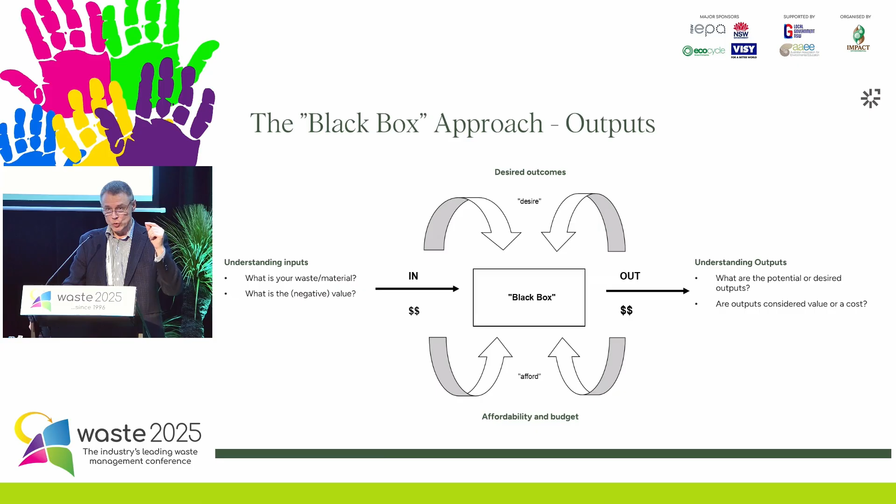So the same box, but slightly different story. In anaerobic digestion in Australia, it's all about the outputs. We know what the inputs are. There's plenty of food waste around. There's FOGO around the corner, and you can anaerobically digest all of this stuff. The problem is, what do you do with the stuff coming out the other end? We know a little bit about biogas, because why? It's pretty much the same as landfill gas. But digestate.

The EPA in New South Wales is on a funny planet because they say, we really want you to process organic waste. And yes, we certainly support anaerobic digestion. Fantastic. Have they got a regulation for digestate? No. So what do you do? You don't invest. It's very simple. It's really, really simple.

The environment industry, our industry here, lives and dies by regulation. If we didn't have a landfill levy, there would be 2 people in this room, landfillers, right? And they would be interested in AD, in landfill gas. So all of us here live and die by regulation. And I think the government isn't really deeply aware of that really simple message. But if you've got the wrong regulation or no regulation, it's a risk, right?

So if I look at, and Angus will talk about the regulations a little bit later on. If I look at New South Wales, to me at the moment, when it comes to anaerobic digestion, it goes into the basket case. Because if you want to do anaerobic digestion in New South Wales, you have no regulation for the digestate, so you have to then treat it as a compost. That is an additional cost, and in most cases, I'd say it kills the business case.

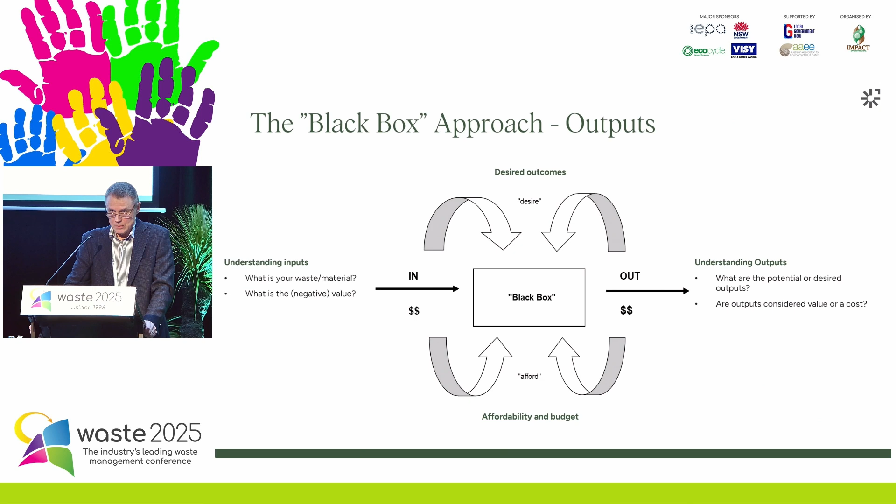It would be quite different if you had a regulation that allowed, after certain treatments, to take digestate out to land. Digestate can have fertilizer values, and suddenly the whole story changes because now you've got a value. Now you can talk, now you can create a business case.

Anyway, sorry to say that, but we need working, realistic, commercially viable regulation. Without that, it ain't going to happen. Can I have the next slide? Thank you. So SLI has done a couple of AD projects around the world, and here are some very high-level numbers. Keep in mind, they're high level, and a lot of these numbers depend on the detail, on the location, on your development approval, on your licensing conditions.

And of course, a lot of it depends on the use of your biogas and the pathway for digestate. We'll talk about biogas use in a minute, and we talked about digestate beforehand. But if you look at these numbers, they give you a high-level idea. We're talking, if you talk high-tech anaerobic digestion, European style, designed for being operated within the vicinity of urban development, you are talking pretty much the same investment as you need for an enclosed composting facility, maybe a bit more. The difference between dry and wet is not that big.

The difference between biogas to CHP, which is combined heat and power, to biogas to biomethane is between $4 and $5 million. That is the capture of the CO2, the filling station for the gas, and when you then talk grid injection, it costs even more, right? Which in Australia is, I think, not viable.

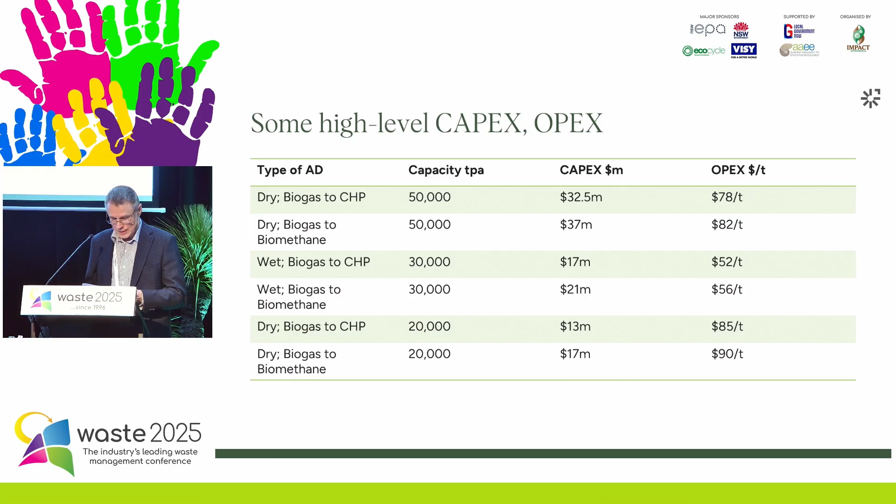Thank you. Next slide, please. Oh sorry, yeah, I can do it myself now, I hope. So, some other commercial aspects. I think we still don't value biogas or biomethane really in Australia. Little example.

The typical biogas content of food organics is around 150 normal cubic meters per ton. That has been proven many times over. Bill can confirm that for some work he's done himself. And that is biogas, so that's not methane. Biogas is a mixture of CO2 and CH4. Garden organics, that is the leafy matter—wood doesn't digest—has around 90 cubic meters per ton in biogas yield.

The methane content typically fluctuates between 50 to 60%. If you assume 10,000 tons of FOGO with only 10% food organics and 85% garden organics, and I've just assumed 5% contamination in there for the sake of the numbers, you get around 915,000 normal cubic meters of biogas. That has an energy content of $235,000 at a wholesale price of $46 per megawatt hour. That $46 was the average wholesale price into the grid in New South Wales in the last quarter of last calendar year.

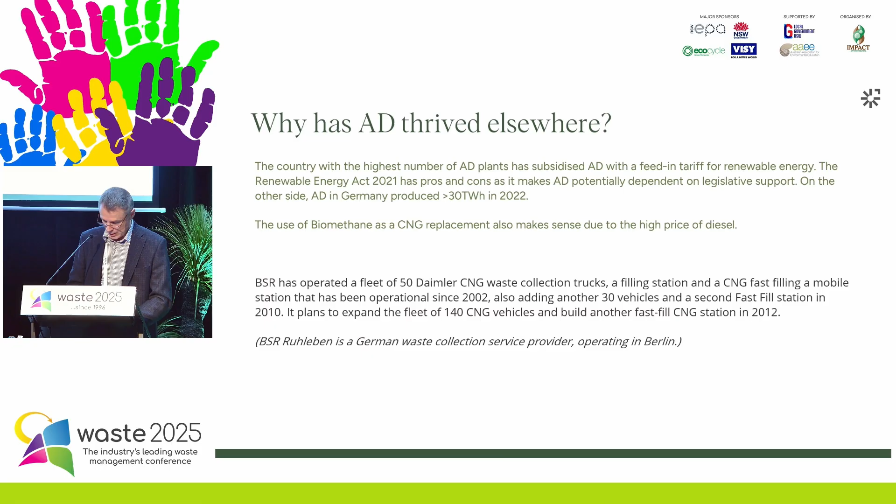When we talk about biomethane replacing the price of diesel, you might ask how does that work. Well, the city of Berlin has been doing this since 2002. They take their FOGO to an AD plant, strip the CO2 out of the biogas, compress the biomethane, and fill it in their trucks. They now have a fleet of, I'm not sure, 140 of those trucks running around Berlin on waste, collecting the waste. This has been going on for around 20 years, so it's not a big deal.

So why has AD thrived elsewhere? Well, as I said before, regulation helps, politics help. In Germany, for example, they had a feed-in tariff for biogas or biomethane, so you knew what you were getting for your product. AD in Europe is largely agriculturally based, because the agricultural sector has a lot of organic waste, and digesting it makes perfect sense to them because they can use the biogas on their farm to cut down their own operating costs.

Germany has around 10,000 AD plants. So I don't want to hear from anybody anything about technology problems. If you can't get it going, you wouldn't have 10,000 plants around. The gross electricity production in Germany by those plants was around 33 terawatt hours per annum. So, 52,000 jobs in the bioenergy sector.

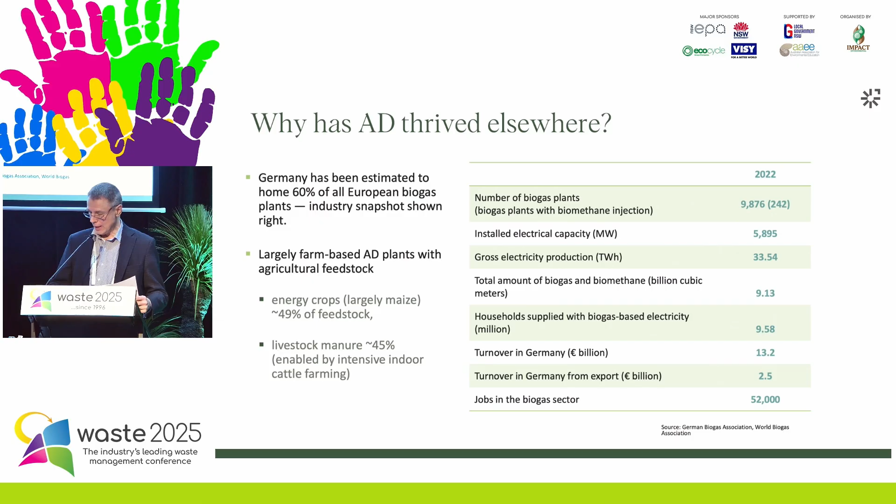Points that should convince a politician to do something for it. And that's how I'd like to end my presentation. Thank you very much.

Thanks, Frank. Great start. So if we can pop over to the next set of slides. It's my turn. Great, and that's the right button. Always press the right button.

Okay, so a few key messages to kick off. Planning and regulatory compliance for anaerobic digestion is not easy, but with determination and good advice, it is achievable in New South Wales and Australia more broadly. It is extremely important to get the expectations of decision makers right up front. And the good news is, with high regulatory barriers, those remain barriers for entry for everybody else. So if you can get through it, your competition has a fair wall to get over to be competitive with you.

I thought it was best if we really frame the discussion, because we want to open this out to you guys a bit later. So what are we talking about? Frank jumped straight into it, but really here we're talking about centralised facilities where waste is collected from waste generators and delivered to a separate processing facility. So this is not on-site stuff. It's a little bit easier to achieve from a regulatory point of view. And we are talking fairly large-scale facilities in the context of Australia. We're talking about a minimum economic scale for a centralised facility of about 20,000 tonnes per year.

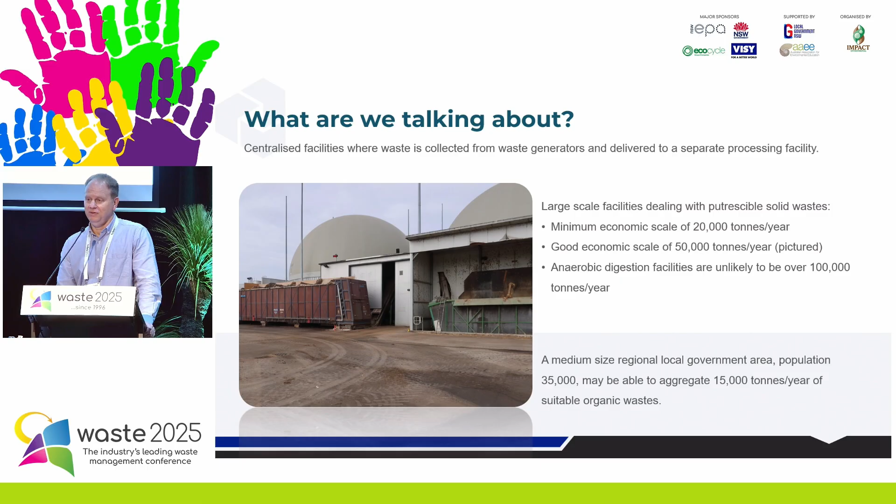There are many other parts other than just anaerobic digestion to an AD facility. You're going to need gas storage, either with steel or membrane covers. You're going to likely need a CHP, a combined heat and power engine. Alternatively, you can upgrade the gas to a fuel to make biomethane. You can dry and pelletize the digestate like the Earth Power facility does in Sydney. And you can, if you're very clever, use the heat for adjacent industrial uses.

Now, I think Frank touched on this, that the regulators have shown a bit of a preference for digestate going to composting to ensure pasteurisation and stabilisation, but some AD processes can also pasteurize. It really does add to the cost if you have to run a whole separate composting process next to an AD facility. But it's the way the regulations are set up at the moment, particularly in New South Wales and Victoria - digestate going to composting is easier to get over the line.

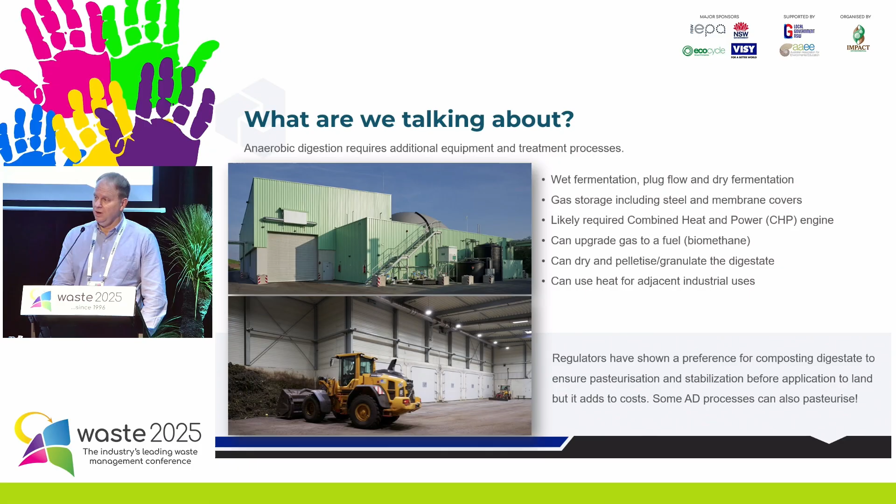Okay, so again, we're framing the discussion here. What are we talking about in terms of waste inputs? Because what regulations apply to the construction and operation of these facilities depends, in part, on the types of wastes that need to be processed. So we're talking about source-separated waste. They're almost always going to need some form of decontamination, as Earth Power found out the hard way.

The types of materials we're talking about is commercial food waste. FOGO can definitely go into these types of facilities, particularly if they're dry anaerobic fermentation, but usually not garden organics or wood waste. Those are sources of carbon to do co-composting with the digestate after the AD process.

Other sorts of inputs we commonly see as being interesting for AD is grease trap waste, septic pump outs, and dissolved air flotation sludges. It's really an open question about whether we should consider adding in biosolids. Depends on the source of those biosolids. There's definitely a lot of regulatory risk around biosolids in the coming years, application to land. Basically an AD process doesn't help any more than a composting process in removing the risks associated with things like biosolids.

These other inputs like manure and paunch, as Frank said, in Europe agricultural inputs are common, but here, can you actually fund the facility with gate fees from those sorts of materials? Not really. So you've got to have all the other regulatory frameworks lining up and policy encouragements lining up to make that sort of input happen. And food processing waste, almost certainly, but you've got to really make sure you characterise it.

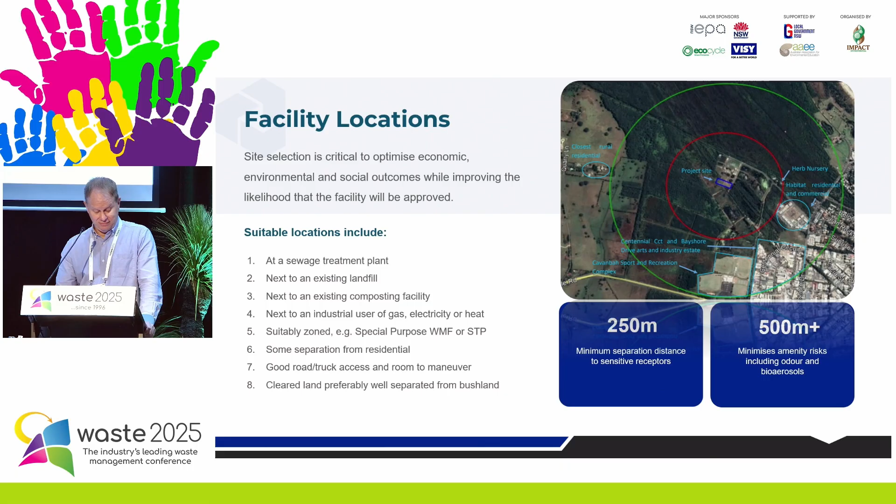Really good access to roads, suitable for large vehicles, trucks, and cleared land is preferred, particularly to avoid problems around complying with various biodiversity regulations. Okay.

Okay, the other aspect is outputs and their uses. So the various products coming out of an AD plant: digestate, it's pretty wet and unstable. As we talked about before, you can have a pelletized or granulated organic fertilizer that makes it a lot more transportable. You can have composted digestate, biogas or biogas upgraded to biomethane. Electricity for use on site.

One of the best usage cases for AD, I think, is to actually provide the energy for a waste management facility to operate itself. Particularly large in-vessel composting facilities can require a lot of electrical power. Heat for drying or industrial uses. The drying helps in the pelletizing process. And carbon dioxide as well, interestingly. If you separate the carbon dioxide from the methane, you can actually have a use for the carbon dioxide too. So that's a wide range of uses there, and pictured there is actually a little biomethane fuel station from that same plant in Austria.

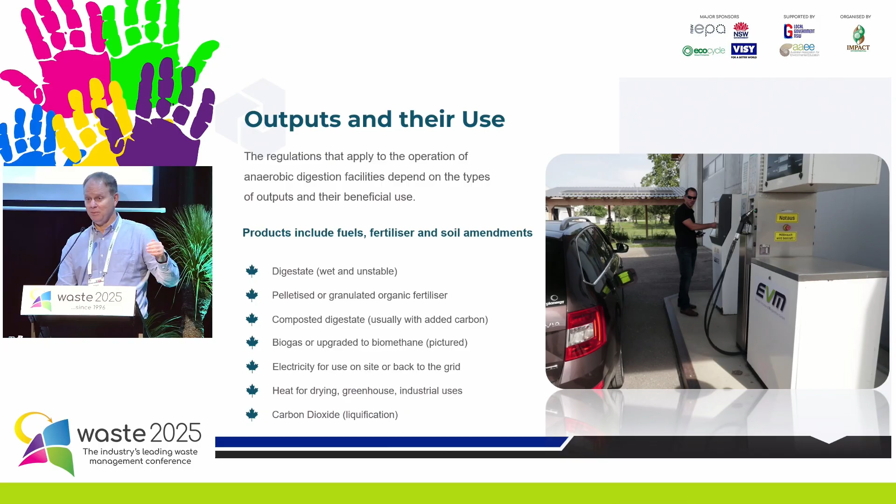So, overview of planning and regulation. This is a very top-level overview, okay? And I've made it fairly focused on the New South Wales context. So, starting at the bottom level, local level, you're going to have to...

It's not actually moving, yes. Yeah, lift it up higher.

So, meeting all the local LEP and DCP requirements, obviously. It'll be a type of energy recovery facility, not just a waste management facility, so you've got extra hurdles to jump over there. In New South Wales, that'll make it a designated and integrated development, particularly at the scales I've talked about. It's generally approved at a regional or perhaps state level. Very comprehensive EIA required. Extensive consultation is really important. The community doesn't generally know what anaerobic digestion is. They've got a decent idea with composting, but not so much with anaerobic digestion.

And the EPA will be involved in both the consent and issuing the license. And be aware that the biogas is an eligible waste fuel under the Energy from Waste policy in New South Wales, and you're going to need a specific resource recovery order and exemption to burn that stuff in your CHP, even though you're burning it on the same site you're producing it, which is really interesting. Found that out the hard way.

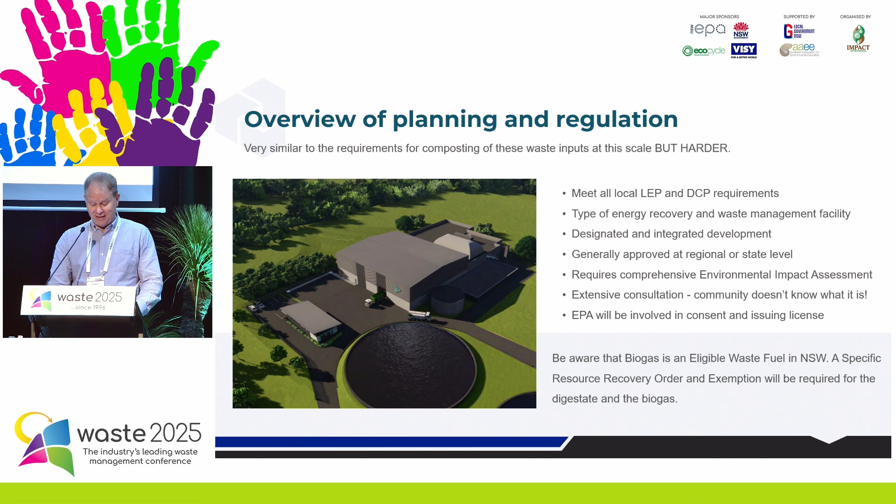So, planning pitfalls. Got to start really early. At least 2 years. Absolute minimum. Really longer. It can take 5 years quite easily to get one of these facilities up, in New South Wales at least. And in fact, we're in a bit of a moving feast there. In that sort of time frame, the regulations and the guidelines can actually change while you're planning it. So work really hard on consultation, explain the project to all stakeholders, including all of the government authorities who don't necessarily know what it is either.

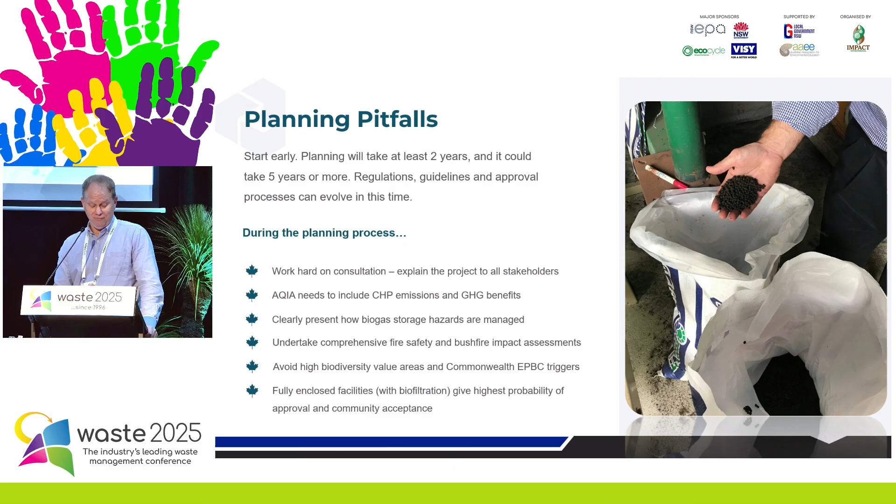Your air quality impact assessment, make sure you include your CHP emissions, and also work out the greenhouse gas benefits. That's one of the biggest positives of an anaerobic digestion process. Clearly present how the biogas storage and combustion hazards are being managed. Okay, surprisingly large worries around that. So you'll end up having a comprehensive fire safety and bushfire impact assessment, particularly if you're close to bushland. And I would say fully enclosed facilities are the way to go.

Okay, again, I'm going to focus a bit on the New South Wales situation here. The New South Wales Resource Recovery Framework is what applies to the application of the outputs to land and the biogas. In Queensland, there's arguably a better framework that at least contemplates an end of waste, the end of waste framework, which publishes codes and approvals, a bit like our general and specific resource recovery orders and exemptions in New South Wales. If you want to ask more questions about that, there's quite a bit of detail, so we can get into it afterwards.

Okay, so look, one of the biggest problems we have in terms of the regulatory risk is the anaerobic digestion facilities usually require these specific orders and exemptions, but they won't be issued until after the facility is built. So basically, as an investor, you have to go in trusting that you're actually going to be able to take this output to somewhere other than a landfill, which is a bit of a big commercial risk.

It is possible to submit an application to the New South Wales EPA before construction and get feedback, and you should seek a technology with a great track record of processing the same, ideally, but probably just similar inputs overseas. And you've got to characterise those inputs and test the outputs, possibly at a pilot facility elsewhere in Australia or overseas, or do it bench scale, which I've previously done with Bill before.

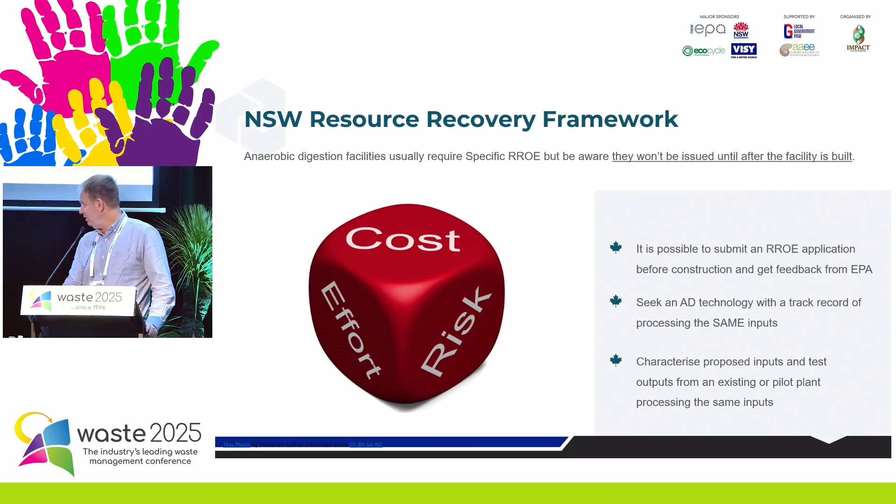Okay, so there's a bunch of new guidance and updates to regulation going on in New South Wales, or at least consultation on it. So there's new guidance on the resource recovery framework. To be honest, it doesn't really change much. It just doubles down on it and explains it in a lot more detail. There is this thing called the resource recovery innovation pathway that looks a bit exciting, but it's still a concept at the moment. Looks good. But yeah, the jury's still out on whether it will actually be implemented the way it looks at the moment.

The New South Wales Energy from Waste framework is also under review, but biogas is effectively proposed to remain an eligible waste fuel, so that doesn't really change things. And the old 4 locations identified for energy from waste, well, AD doesn't have to fall in those locations, it can be anywhere, so it's not limited by that.

Also, there is still a review of the biosolids guidelines going on. When that will end, I don't know. They're apparently still doing a lot of direct consultation with stakeholders, and we still await whether that will actually massively change what can be done with biosolids. And biosolids are often going into AD facilities too, so that will be a big change to the framework. So there's a lot of regulatory risk in terms of change as well. That's the message. But it can be navigated, and a conservative path can be taken to start with.

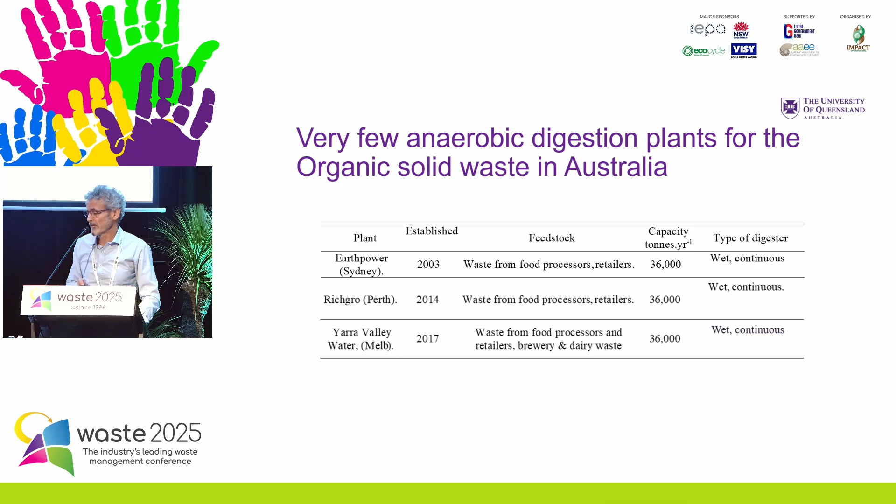Without dwelling on this too much, anaerobic digestion, regardless of whether we're talking wet or dry processes, the stages are, well, first of all, microorganisms don't have teeth, so the organic solids have to be solubilized, and certainly if you're talking about green waste, this is the rate limiting step. And in fact, the more solid the material is, the more lignocellulosic sort of materials, they're very easy to operate, because as soon as material is solubilized, it's going to be converted to methane. In terms of the stability of the anaerobic digesters for more solid sort of material, very simple. It's a bit more challenging if you've got readily soluble sugary sort of wastes. Of course, they can become acidic and the system can sour, so they require a bit more control.

So once you've hydrolyzed and solubilized the organic material, and you've converted it to monomers or short-chained molecules, then they need to be fermented to either acetic acid or volatile fatty acids, alcohol, and then there are a group of organisms that can get energy from those short-chain compounds and produce acetic acid and hydrogen, which of course is the substrate for methanogens.

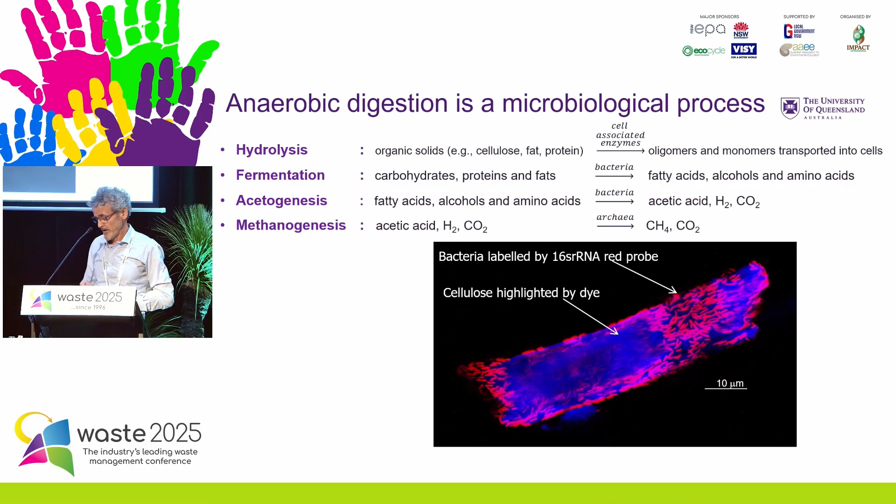And so if we look at the picture of an organic particle, it needs to be colonised initially by the organisms that can hydrolyse, and they're only doing that because they're going to eat the products, so they don't do it for altruistic reasons. They need to eat themselves. And then as that biofilm establishes, all of the other organisms further on down the chain, including the methanogens, sit on the surface in an extracellular polymeric matrix under the microscope.

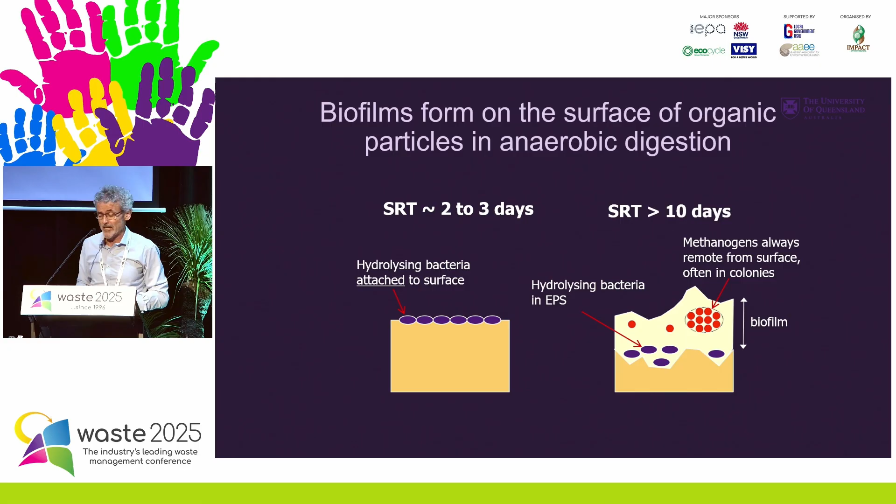So you're just facilitating that process, and anaerobic digestion, even though the microbiology of the process is complex, all these organisms are ubiquitous, and I'll just demonstrate that by the fact that we've started anaerobic digestion processes on a number of occasions without any inoculum. Okay. Dry. Well, even a wet process. I'll give an example of that.

So again, just looking at the two extremes, I've made one mistake here. This should be less than 10% dry matter. If we're talking about a wet process, you need to be able to move the material around. So wet processes are always continuous. You never have batch wet processes. So you're pumping in the waste, and the digestion is very quick. It's not controlled by hydrolysis.

So the main challenge with wet processes is retaining the biomass, because if the hydraulic residence time is only a week or something, and the solids also have the same residence time, you're going to wash out your microorganisms unless you retain them.

And you can think of Golden Circle, the fruit cannery; other plants have this sort of process where they had a fermentation acidification tank initially. So fresh material comes in here, and then the liquor goes through an upflow anaerobic sludge blanket reactor. So the methanogens are in granules here, and they're retained. And so this process can run at a very short residence time.

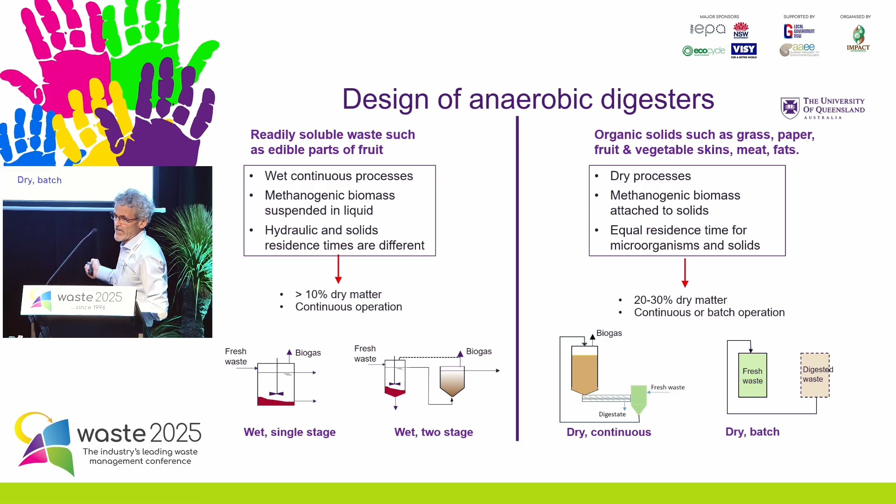But then we have the batch processes, and so you've just got a mature batch in a shed, in a container, and you might run liquor from that container to the fresh batch, or you might actually run some of the solids from the old batch and mix it with the fresh waste to start the digestion.

And so here's some examples that we've done, and as I say, as academics, we compete on a global scale in publishing, and so we tend to try and find niches in Australia where we can implement this sort of work. And probably the initial experiment we did was a few years ago now. This is 2008, this publication, and this is Bush Holdings banana

packaging shed in Tully, and if you've watched the War on Waste, they've talked about bananas there. They waste so many bananas, well, certainly back in these days, they wasted 60% of the crop or something because the bananas were fine, but they were the wrong shape. So we were feeding bananas to a hopper.

Here's a hopper here. The bananas, here's the digester here. And so they just pumped liquor from this digester and flushed the rejected bananas into this huge bag, basically. And the bananas are 90% water, and of the actual solid content in banana, about 90% of it is biodegradable.

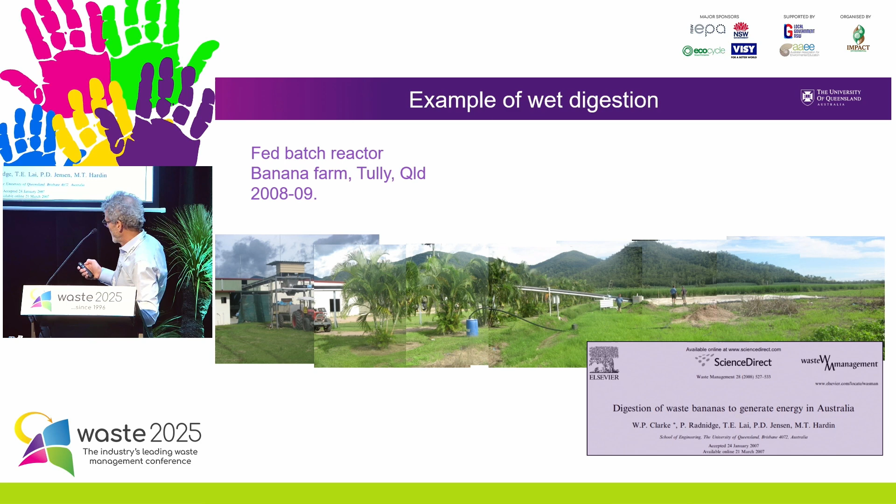So we were getting over 300 cubic metres of methane per dry tonne of banana. And we published this work. You can see here, this reactor was just fed with bananas and sodium bicarbonate as a buffer. No inoculum. We didn't want to bring sewage sludge into a food processing facility, so we had no inoculum at all. And you can see here the digester working quite happily with biogas being produced.

So that's an example of a fed batch digester. By that I mean that bananas were just put in; because they were so completely digestible, there's not much solid residue left. So we could just keep on feeding bananas in. Eventually, the digester had to be desludged, but after a few years.

That's one application. Another application was on the UQ campus. We implemented an anaerobic digestion plant to treat black water, being toilet water, basically from the mechanical engineering building in the middle of the engineering precinct. I'll just show a couple of pictures there. But the objective of this anaerobic digester was to produce non-potable Class A water, which we irrigated right there around the plant, in the middle of the engineering precinct.

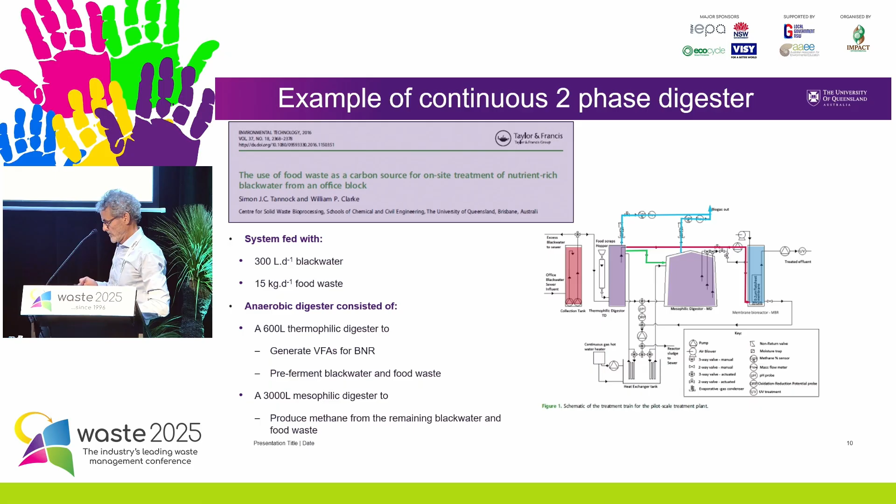There we go. I'm watching. Thanks, Mike. Yeah.

Here's the plant here, and the wastewater was pumped directly from the building. We didn't have to handle any black water. Pumped into the container. We had to manually feed the food waste, and we were producing about 4 cubic metres of biogas per day through a flare up the top there, and then we were producing the non-potable Class A water, and we're irrigating that where thousands of students move.

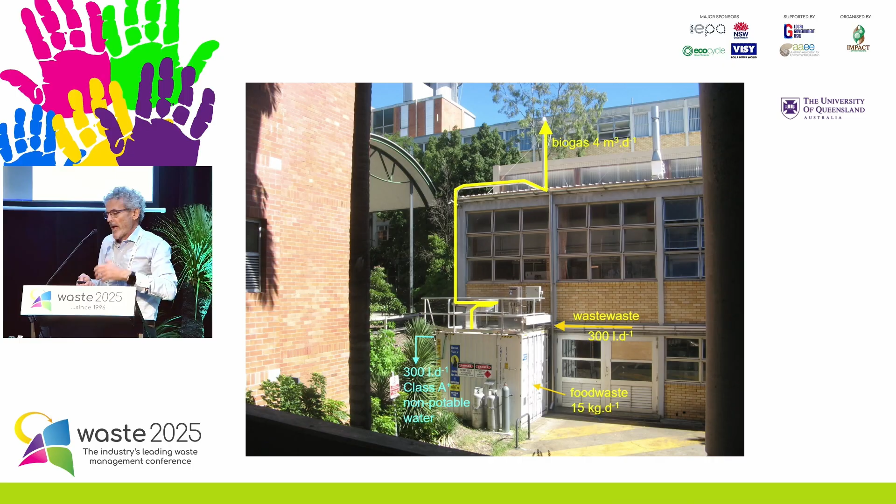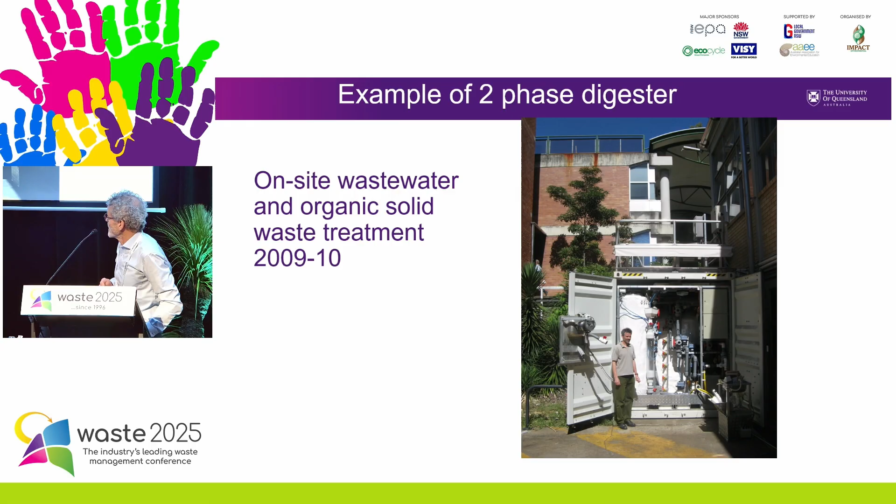And I can see the slide here. It's not coming up. Oh, there we go.

So there's the first stage. We had heat exchangers, so we ran the fermentation tank thermophilic, 55 degrees. The methanogenic tank was 38. The effluent tank, where we stored some of the effluent before pumping out into the garden, the membrane bioreactor.

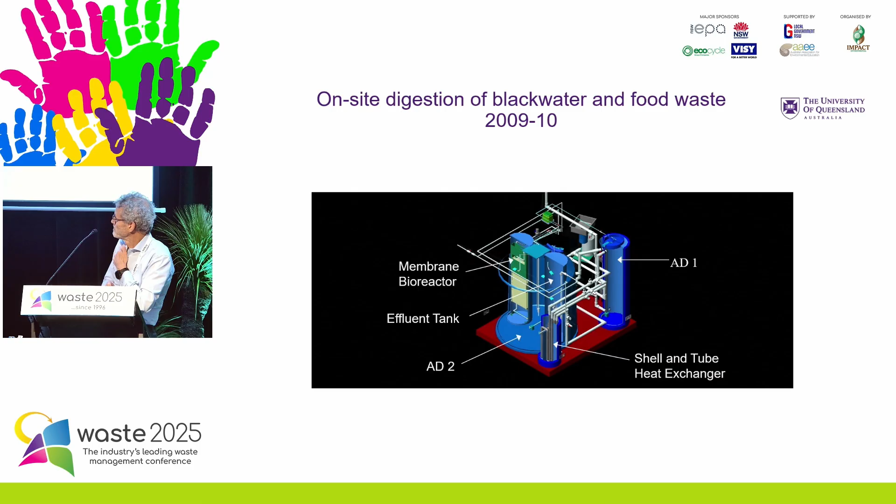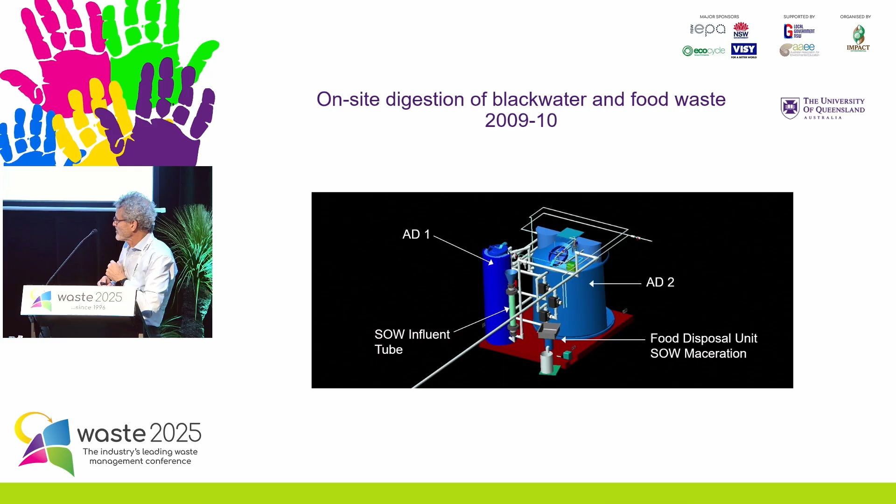Just to give you a different view here. The little tray there's where we fed the food waste, solid organic waste influent. Once we fed it into the macerator, we pumped it into the first stage. So this plant is a bit more elaborate because it was running as a continuous process.

Okay, so now dry batch digestion. We've done a lot of work on dry batch digestion. This diagram was from a paper many years ago, which shows the inoculation process that we use, which is quite a simple process. We just have a fresh batch of waste here, and we just take liquor from a stabilised methanogenic batch of waste, and we feed it to the fresh batch.

And that displaces a lot of acids, volatile fatty acids, from the fresh batch, which we feed back to the stabilised batch, which produces methane. And eventually, after this initial nursing stage, if you like, they can then operate separately and finish the digestion process.

And of course, these processes are established around the world. As you know, California are now stopping organic waste going to landfill, and there's a proliferation of these sorts of plants around the place, and 3 of them look very similar. Materials are loaded into tunnels and then digested.

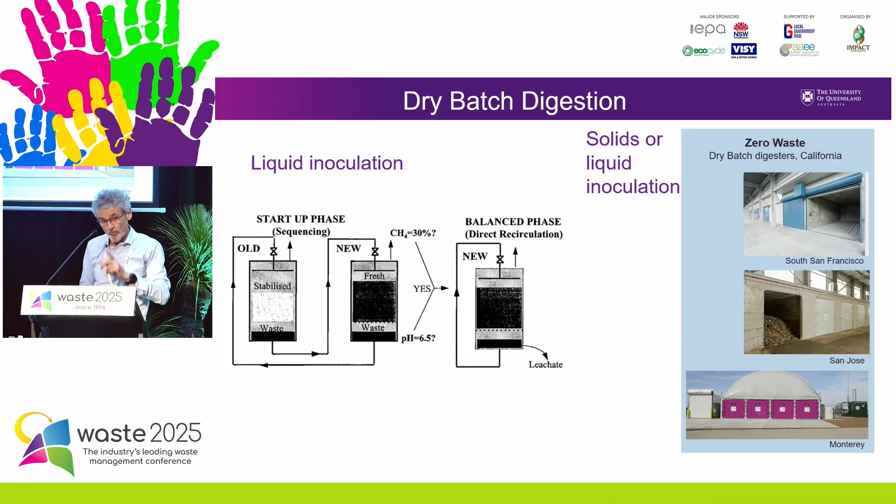But we've had the opportunity to try this ourselves, thanks to Frank here, when Frank was working with T Services and initiated this process. So we've been out sampling municipal solid waste. Over the years, we've done a lot of work on municipal solid waste, so unsorted municipal solid waste.

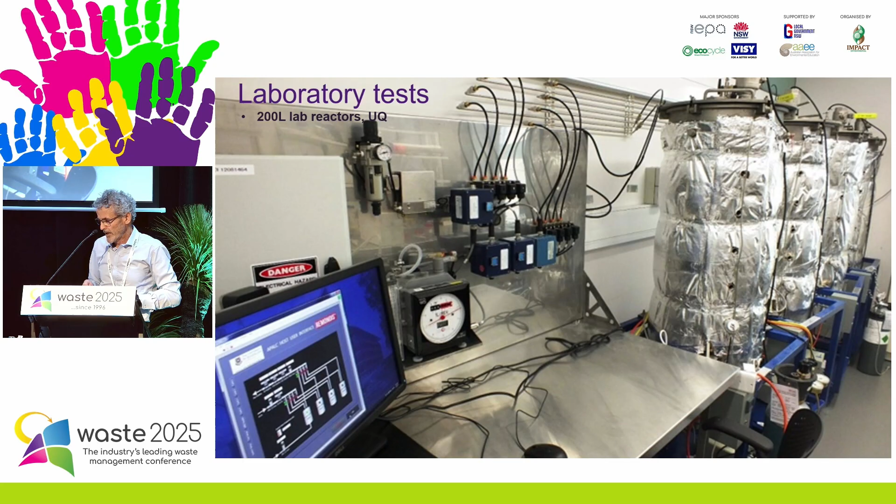We do a lot of lab work, and these are the tools of our trade, these 200-litre reactors. You need a fairly large reactor to get a representative fraction of solid waste. So we can run trials at various configurations here. But the one trial I want to speak about are the biocells that we ran.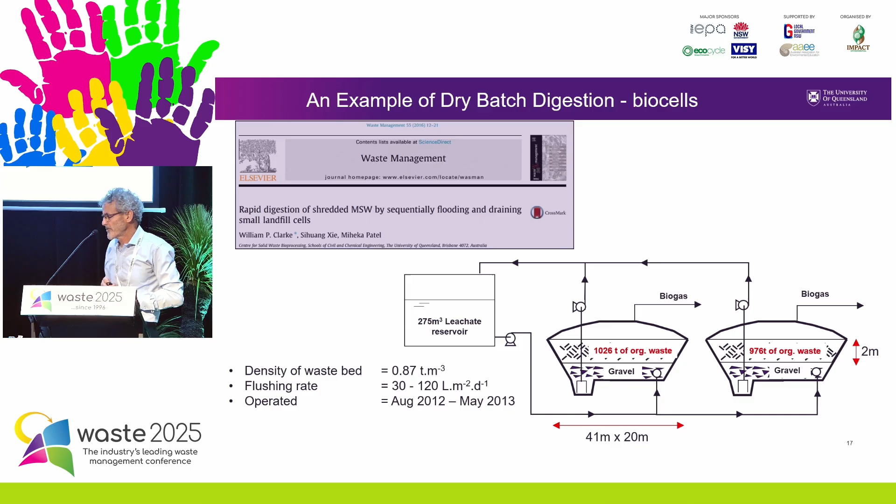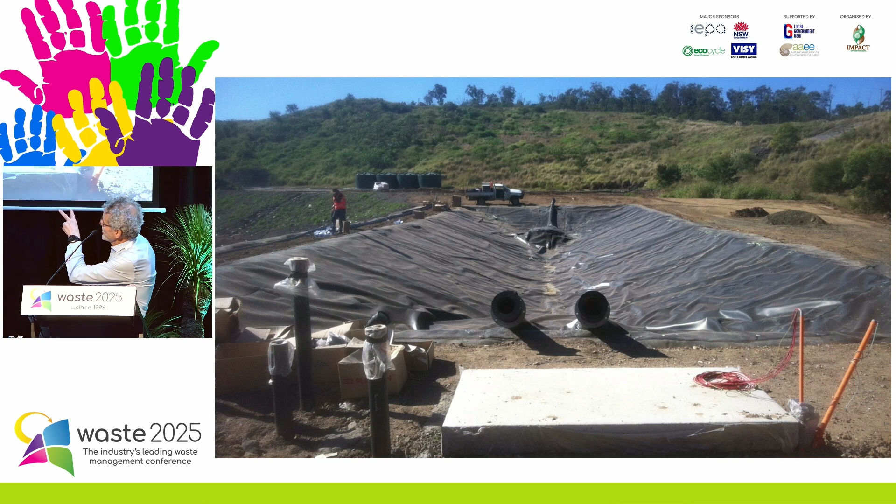Some pictures of the construction of the biocells. You can see the suction lines here, the feed lines at the far end of the cell there.

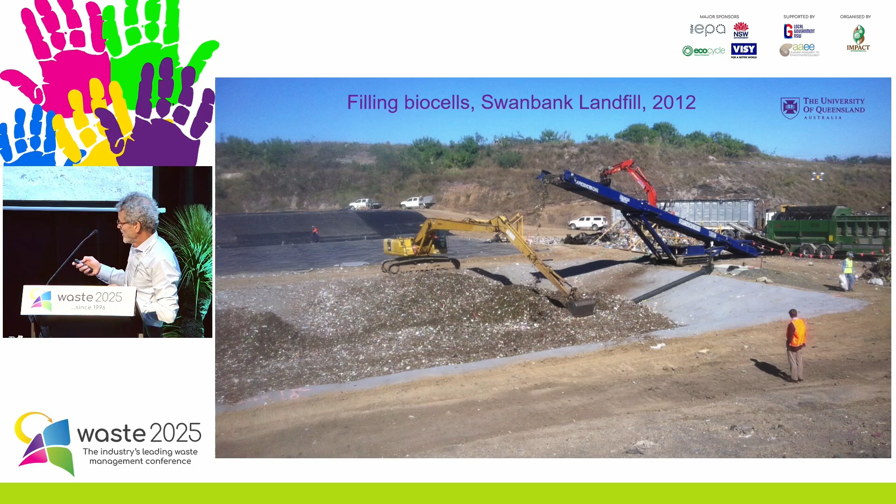This is Frank standing looking at his baby, and here is the feeding of the cell. So we shredded the waste and then fed the sub 80 mm fraction into the cell, and that was spread around - 1,000 tonnes of it. This is a picture of the material. It looks very organic, but you can obviously see there's a lot of material in it.

And this was, of course, all built when Julia Gillard was the Prime Minister, and we had the carbon pollution reduction scheme, so there was a big incentive there to reduce the emissions from landfill.

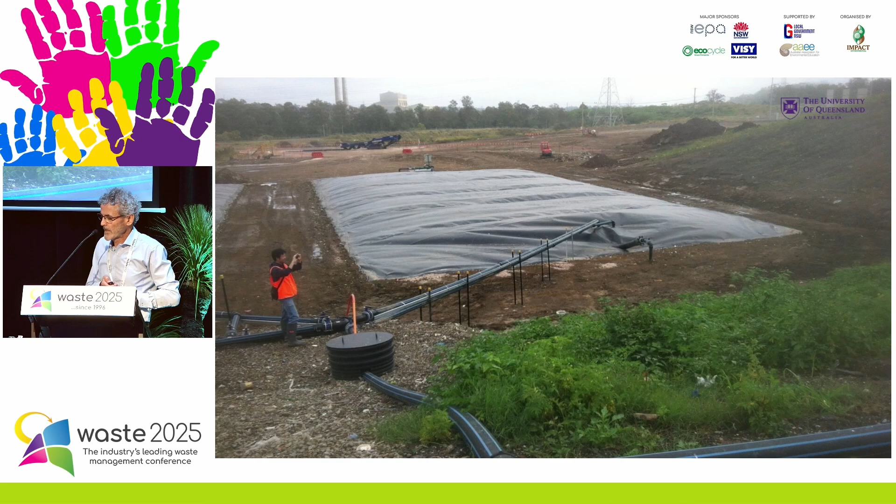So this was in a leach bed scale. And you can imagine if you're running a leach bed at such a large scale, it is difficult to actually get uniform flow through all the particles. There could be preferential flow. But under the flood and drain, when you flood it, everything gets contacted.

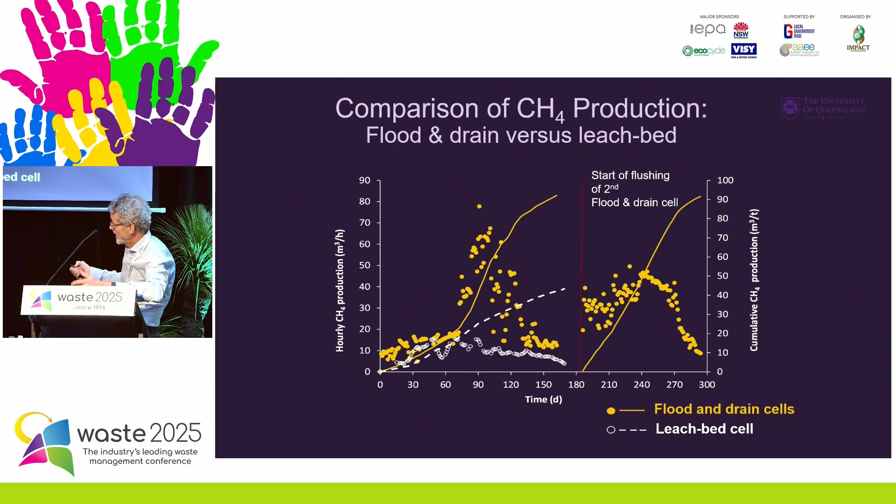And you can see here, this is a performance of our initial cell, and you can see that it was quite slow initially because, again, we didn't inoculate - no sludge, no nothing. It was just the waste itself, where gradually the microbial population built up, and we get this very sharp increase in methane production because there was a huge build-up of volatile fatty acids, and once the methanogens established, there was a big spike in biogas production.

And then the second cell started immediately because we had this established inventory of methanogenic organisms, and we got basically the maximum biogas rate, well, close to the maximum biogas rate from the very start of the operation of this biocell. So the operation here was about 3 months to completely digest the waste here.

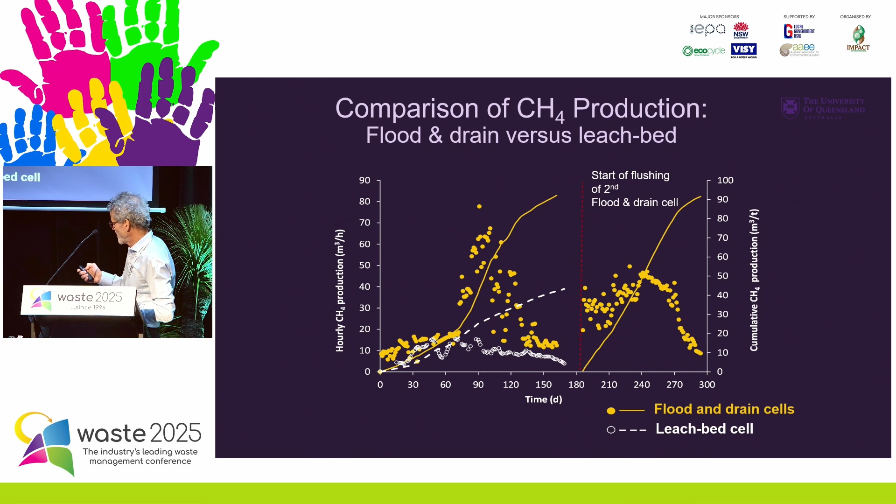And to give you an idea of the yields, the leach bed operation produced, well, I've got two figures here, one per tonne as received, then one biogas yield per tonne of volatile solids. So 120 odd per kilogram volatile solids, or 44 cubic metres per tonne. This is the leach bed, 166 days, and this was only 54% of the BMP yield. So we sampled material quite extensively and measured how much methane we could get under absolute ideal lab conditions.

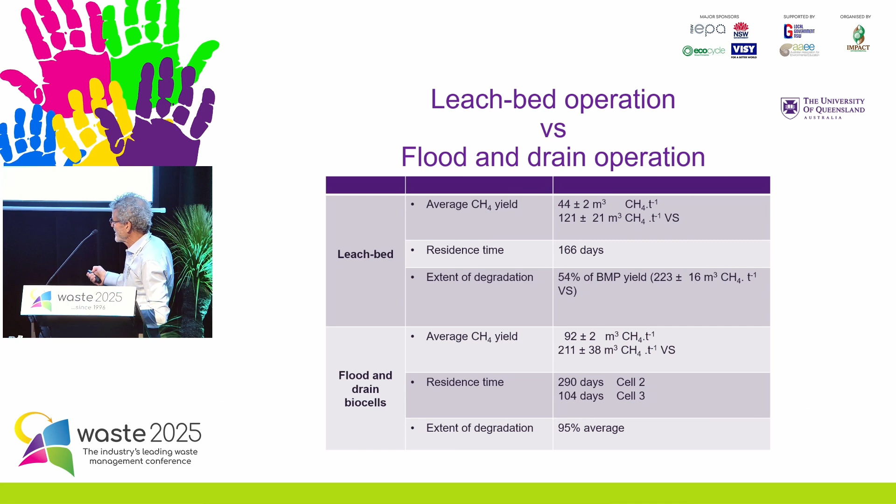Then in the flood and drain cell, you can see the biogas production is almost twice as much - over 200 cubic metres of methane per tonne of volatile solids. Absolutely competitive with in-vessel commercial processes. The residence time, however, is lengthy, 104 days, but I think that would continue to come down with successive generations of biocells. The extent of degradation, 95% of the BMP yield.

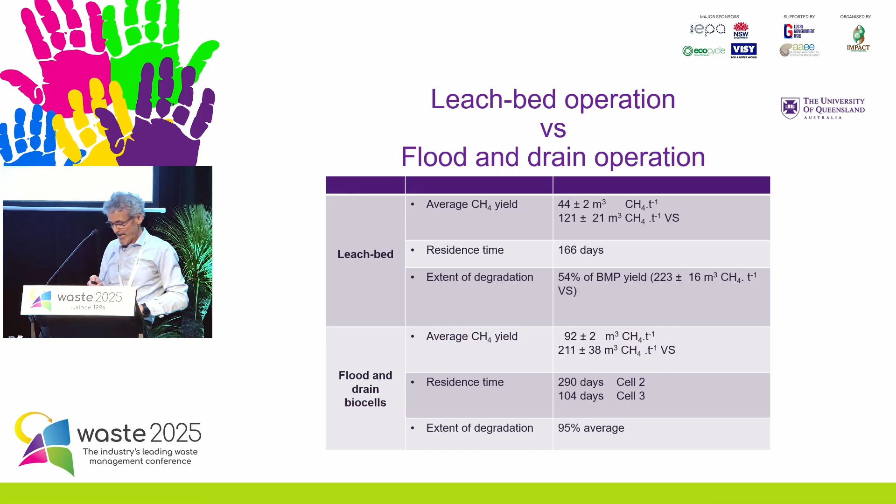So there, just some examples of application of anaerobic digestion in Australia. Okay, and that's my last slide.